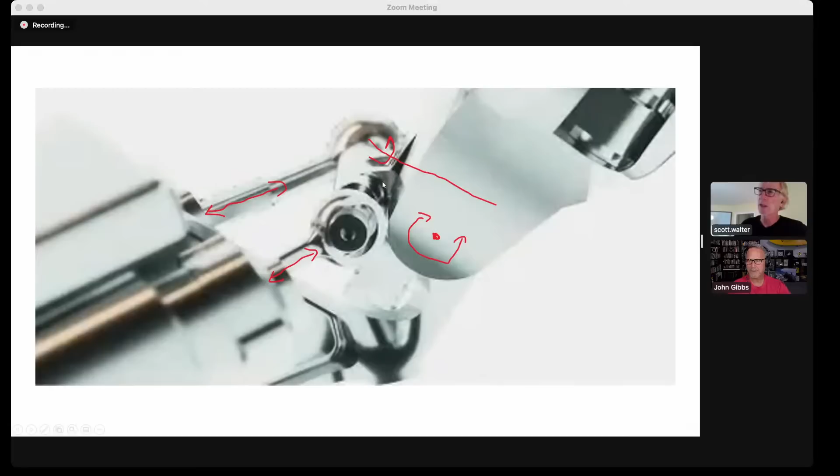Nothing fits. Nothing works. Okay, so if we look at this, what we're seeing is probably articulation here, which is the pitch. This is that yaw, which is that little bit. Right. And what's actuating it are what looks to be these 2 piston and rod mechanisms here that push in and out, and you'll see what looks like a really funny kind of joint here. And that joint is basically a spherical joint. Right. And the idea is it allows 2 degrees of freedom, 2 degrees of motion.

So it's not a pin joint, it has to give a little bit. It has a primary axis where it can rotate a lot, and a secondary axis where you may be limited a little bit, but that's okay. It's not going to be a problem.

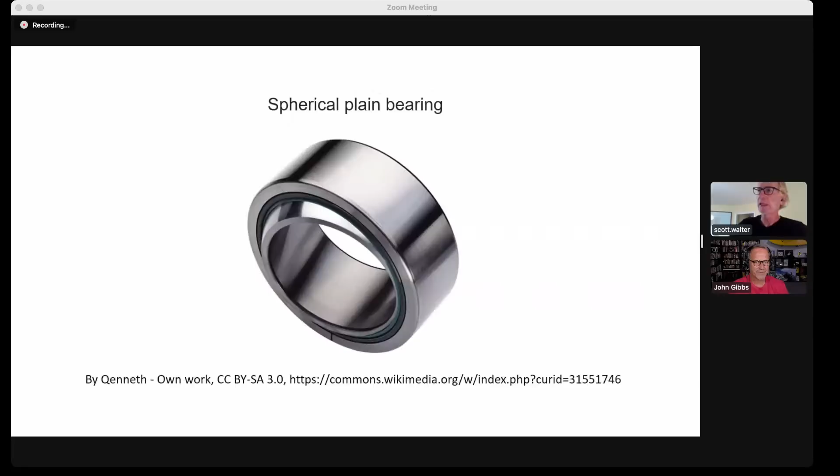It might look something like this. It's not exactly like it, but you can find things like this on Amazon, which is exactly what I did here, I was able to find one. But the basic idea is as the pistons pull, the joint it's attached to has got to rotate also. Yes, and we're going to see that when you get into the reality of the math.

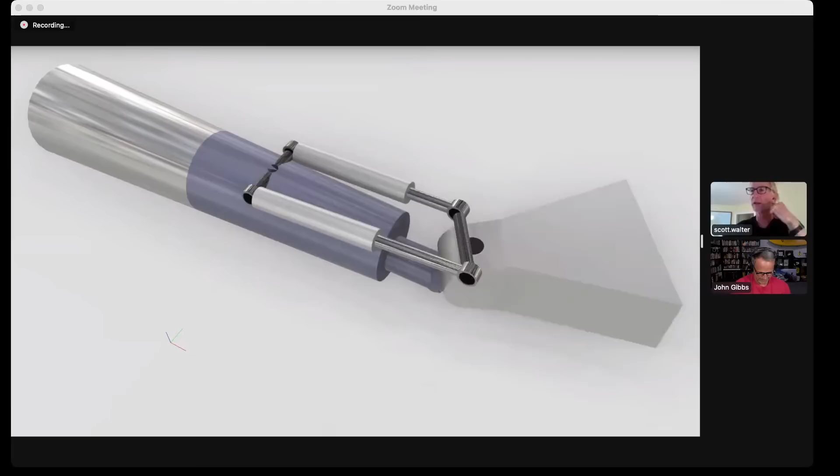This is a simple little movie I made and uploaded to YouTube, you can find it, it's about a minute long. There's also a 3D viewer, which we'll talk about later, that you can download onto your phone, we'll get into that a bit. But you can see a little about what the mechanism does here.

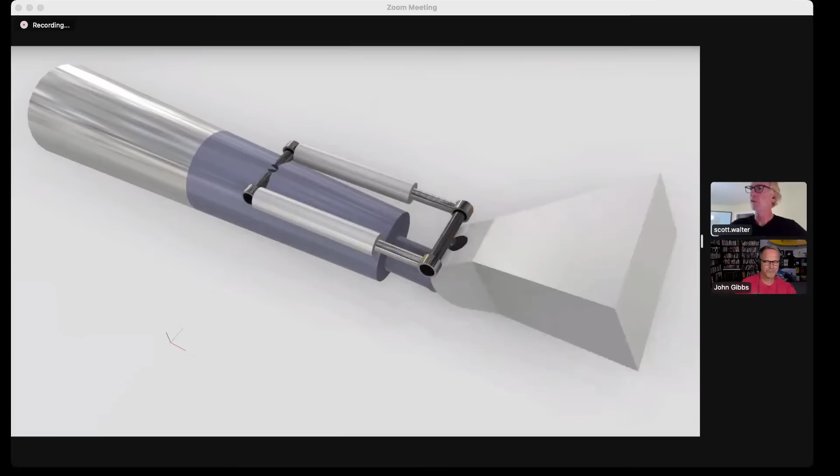I'll run that again. You can see this is the pitching motion, how it's able to do the pitching motion, and that's how it's able to do the yawing motion. Just by having differential movement on those two different pistons, you're able to get the yawing, and if they're coordinated, you get the pitching motion.

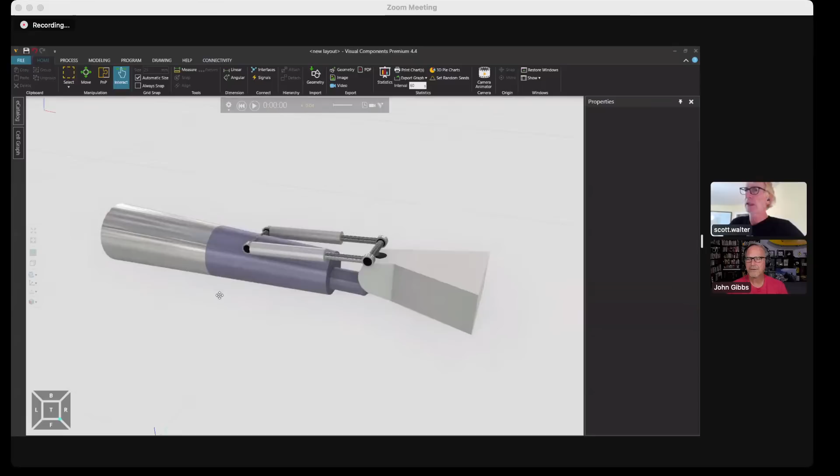Here's where I was able to do the simulation, so we can start to look at this in 3 dimensions. I'm going to jump to an orthographic view now so we can see what's going on. We have an axis of rotation here, and this piston and rod mechanism, with what looks like some pin joints there. The way to analyze it is to overlay a triangle on that. The red and green links do not change, those are fixed, they do not move. You can see there's going to be rotation about where the white dots are.

And if you look at that thing, you would say, okay, so we want to make the hand go up and down, which means we need to somehow change the angle between the red and the green. And that's done just by extending the length of the blue. And when you do that, you see that angle changes. That gets you exactly what you want.

But there's a consequence of moving that angle there. Remember, the sum of the angles has to be 180 degrees. If I change this angle here, that means the other two angles have to change, and you have to calculate those things. You can actually calculate them very easily using something called the law of cosines.

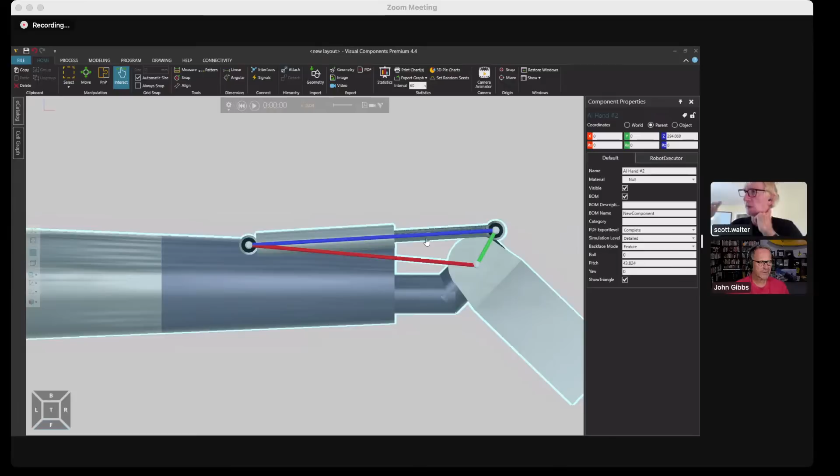And the law of cosines is the general form of the Pythagorean theorem. As a matter of fact, the Pythagorean theorem is the degenerate case when the law of cosines is at 90 degrees. So it's a very simple rule or law that allows you to figure out how it moves. And what that tells you is that when you build this kind of mechanism, not only do you have to have it rotate there, but you've got to make something that rotates here and something that will allow it to rotate there. Otherwise, it just won't work. I mean, that's why it's called the law of cosines. If you don't obey it, it's just not going to work.

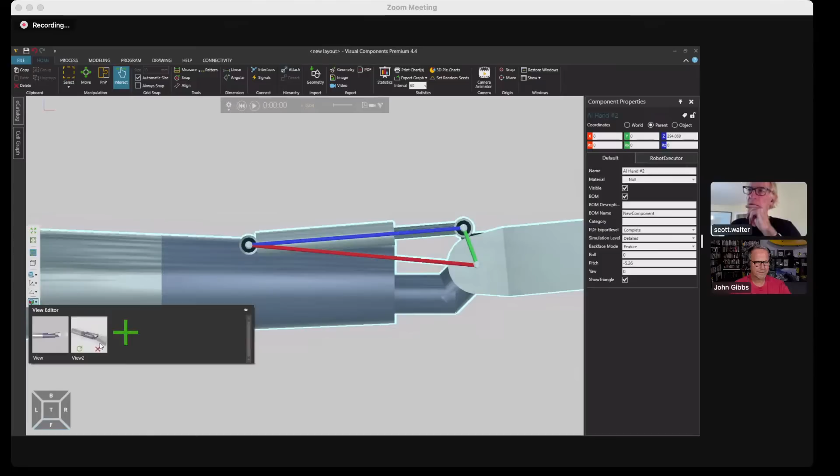Okay, it's very easy to do that in the 2D case. But then when we start to add the other element to it, it gets a little bit trickier, because now when we add the yaw into it, it's no longer a 2D problem, it's now a 3D problem. And you see the triangle kind of falls apart when you go ahead and do that. It just requires a little bit of math to figure this thing out.

Now, in our previous video, we talked about forward kinematics and inverse kinematics. And I said forward kinematics is easy, it's like arithmetic, whereas inverse kinematics is very complicated, and that's where the real math happens. It turns out in this case, it's the opposite. The forward kinematics is very difficult to do, the inverse is super easy.

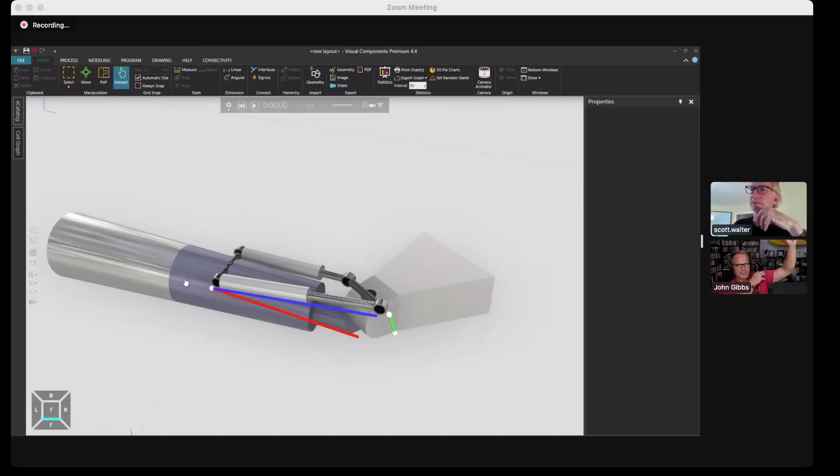And that's because what I didn't say in the first video is that rule applies to serial link mechanisms, in other words, mechanisms that are chained together. This is a parallel kinematic mechanism. Just to put that into perspective, shoulder, elbow, wrist, that would be a serial mechanism. Right, exactly. So here we go.

We have this thing, and it's a little bit tricky to get it together, but we can get it to articulate. And of course, the first thing everyone kind of wonders is how do you roll the wrist? How is that being managed? Well, it's very simple, it just rotates about here. That's it. Doesn't do anything other than that.

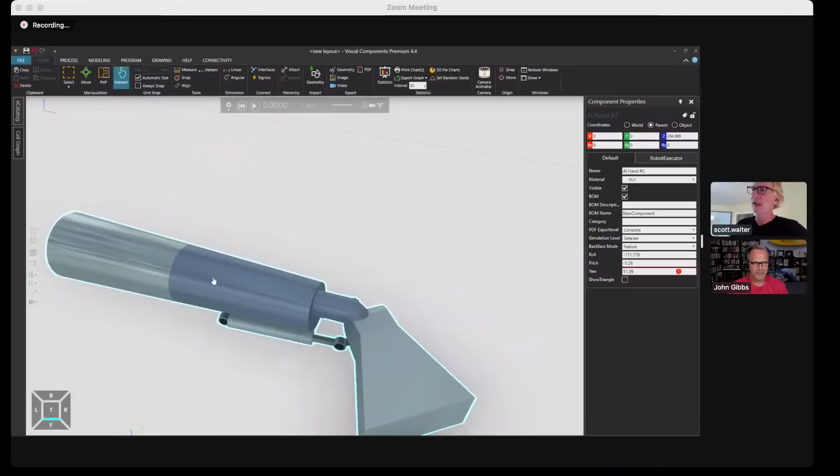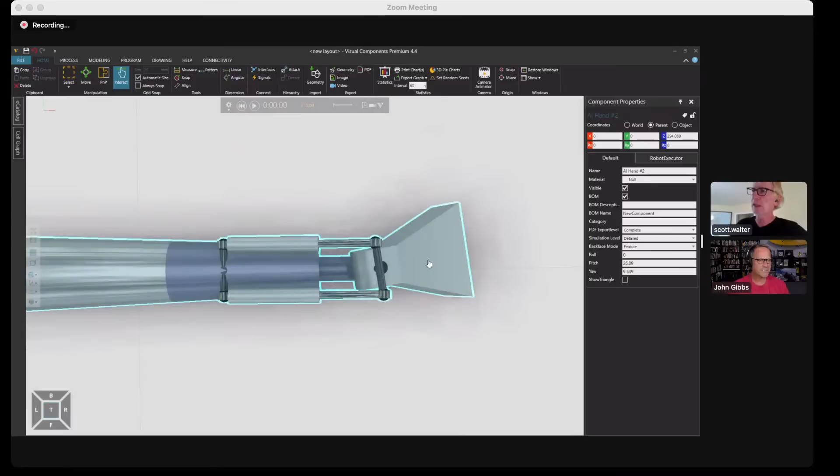And then if we want to be able to do the yaw, you see we can yaw back and forth this way, and then by extending these things forward, we can get that pitching motion very easily. And we can see when we do this, when we go to the top, that when we go to the yaw, it's introducing some weird things here. So we have to have a spherical joint everywhere. We have no choice. In order for that to work and to stay together and be mechanically sound, you have to do that. You have absolutely no choice.

So Mark Plott just threw up a question, which we actually talked about yesterday when we were discussing this, which was why, I think what he's talking about is no pistons or pulleys, but basically the idea of hydraulics and things. But we want to get into that. Can be driven by anything. They don't have to be driven by hydraulics or pneumatics. Right, or anything.

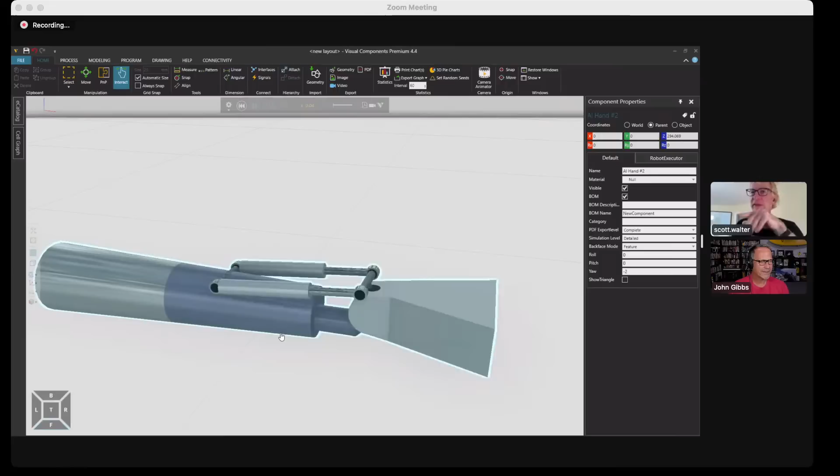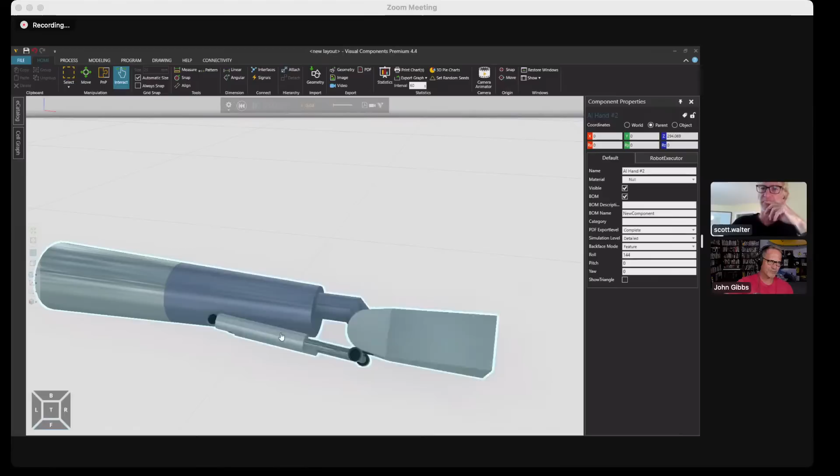So, now, that is something we want to touch on. Do you want to touch on that right now, or do you want to defer that? Because that was the question I threw out to you yesterday. I said, okay, John, how is that actuated? What's going to make that thing go back and forth? The three obvious things are hydraulics, which is fluids, pneumatics, which is air, or some sort of gearing system, which would use a ball screw drive where you have some sort of motor spinning inside of there. Now, these proportions are not quite right.

If we go back to the original drawing, that cylinder looks really big and beefy, and I'm not quite sure why it has the dimensions it does. This was really rough, just to show schematically how this mechanism works.

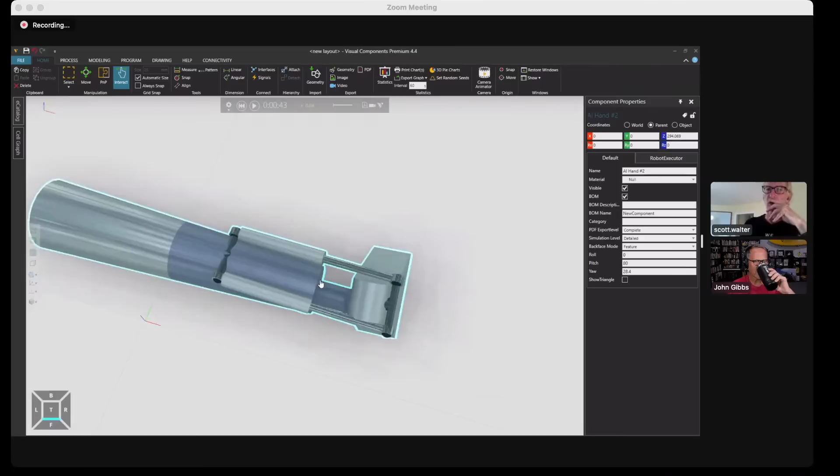I'm pretty sure it's not hydraulics. Now, it does look an awful lot like a forklift, or not a forklift, a backhoe, or front loader, something like that, which you're used to seeing. The thing about hydraulics is they can deliver a lot of power and force very easily, and you just have one motor that's pretty much building the pressure. All you need is a bunch of valves to control it.

That could be one way of doing it. But the problem with hydraulics is they're really leaky, and it's very hard to make seals that won't always leak. The other thing is they're really too powerful, and remember, you're supposed to be able to overpower Optimus, not the other way around. So you probably wouldn't want that. You don't want Optimus to just come up and go, 'Hi, how are you... squish?'

Recall that the grid fins on the Falcon 9 are hydraulically controlled, but for Starship they're going to be actuated by the motor. So even SpaceX is like, well, hydraulics are all very nice, but we're not going to use them in the future because they have too many issues. We think it's better to have them actuated with servo motors. So I don't think so.

However, pneumatics is kind of somewhere in between. Even if they leak, who cares? It's just air. And you can store a lot of power in something like a small scuba tank. This would be like the most steampunk thing if it was, you'd be going constant back and forth doing this. So, hey, maybe it would be.

Hydraulics, I give zero chance of that. I feel like pneumatics has no chance because it's just too loud. I won't rule it out, but I've already been proven wrong regarding the yaw, so I have to hedge my bets and put it out there as a possibility. If it turns out to be true, you heard it here first. But I'm going to say it's probably not.

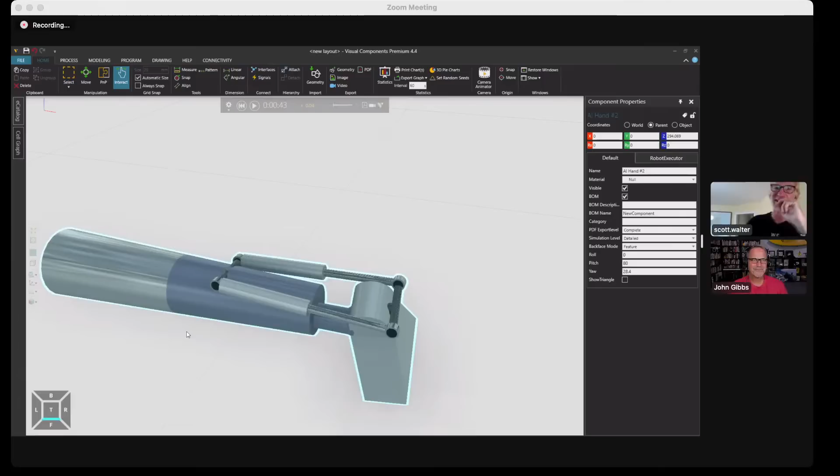It would be pretty annoying to work around a robot that was hissing all the time. But again, it could be kind of cool, and it would be possible. The thing about it is they're very hard to control because it's more of an on-and-off thing. It's something you typically use in a clamping mechanism, you just want to open or close. If you want something in between, it's very hard to control. However, it's really good for force control, so depending on what they want to do, I wouldn't rule it out. You get some pretty bright control engineers between the two organizations, they may have solved a few problems, but I don't think so. I rule it out now. That would be interesting.

Just as an FYI, Mars Embassy asked what about memory metal or other options besides screw drives and things. I don't know enough about that to give a reasonable answer about memory metal.

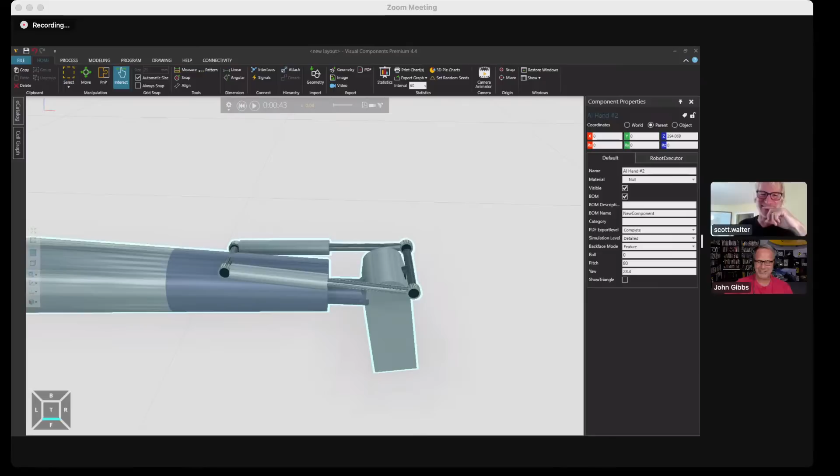Wasn't that Terminator 2? I think that was mimetic alloys. So let's please not turn this into... he's already trolling you, John. It's already turning more silver. It was white and clean, now it's turning silver, so we're already turning into the Terminator. There you go.

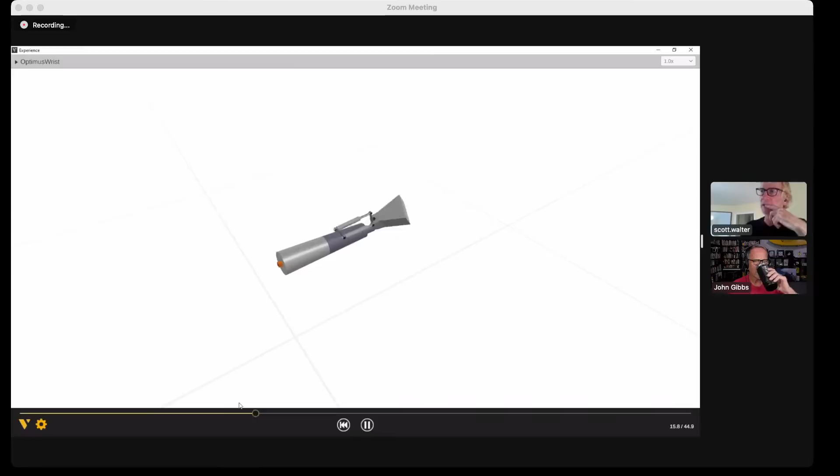Okay, now what I'm quickly going to do here is show you basically the same thing, but notice the application is a little different. What you saw before is the authoring tool that allowed me to build something. This is actually a playback, and as you can see, it's not a movie, it's actually an animation that you can go through and view. This is using a viewer called Visual Components Experience, which is free to download online.

I can even show it on my phone, not just here on the screen. Here is my phone right now, we can see that, so there it is on there, and you can move it around and have all kinds of fun with it.

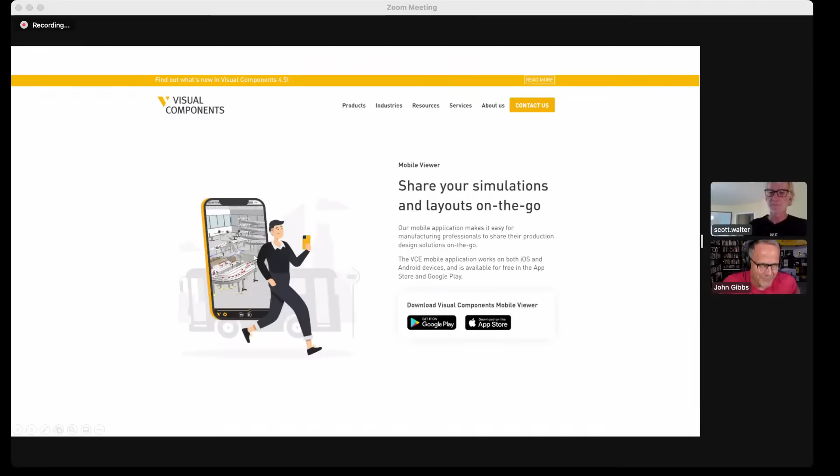Okay, so Mars Embassy and some others were talking about this. Is that the memory metal actually is something that changes? It's more like a muscle where you apply an electrical voltage across it. It contracts, I believe. But again, I kind of wonder, is it kind of like an open closed state, or is it something you can control in between? Again, I'm not sure if you get the fine control.

Well, the other thing you have to remember is not just the wrist, but also the fingers, right? Because there's an awful lot of stuff that has to go on in the fingers, and having memory. We're going to stay away from that. Possibilities. I'm going to touch on the fingers. I want to talk about those briefly, but anyway.

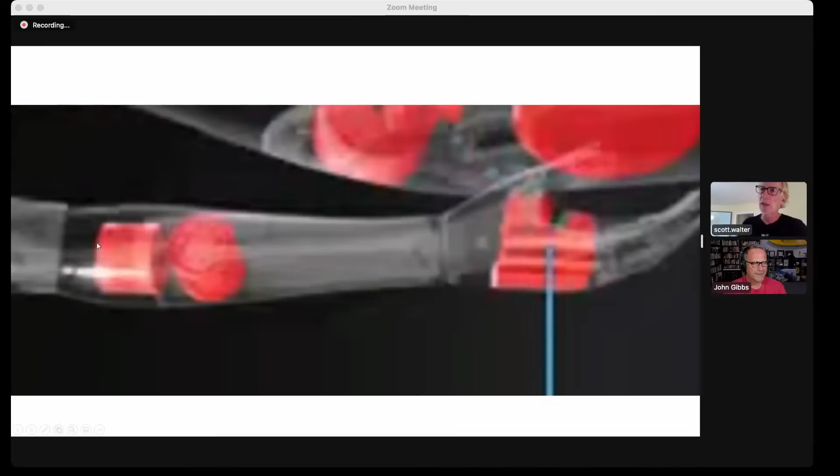And then sure enough, once I do a prediction like that, it's completely wrong, because now this is indicating that right about here is where the forearm rotates. So it's not split in the middle. It's like this whole piece here rotates, and the elbow is back about there. So you have a small chunk here, which is the elbow, and that whole forearm is then rotating through there. Exactly. Okay, so we got that. Now, you got other things. Geo30, Geo5 gave you a great find for the shadow stuff that's inside that original image.

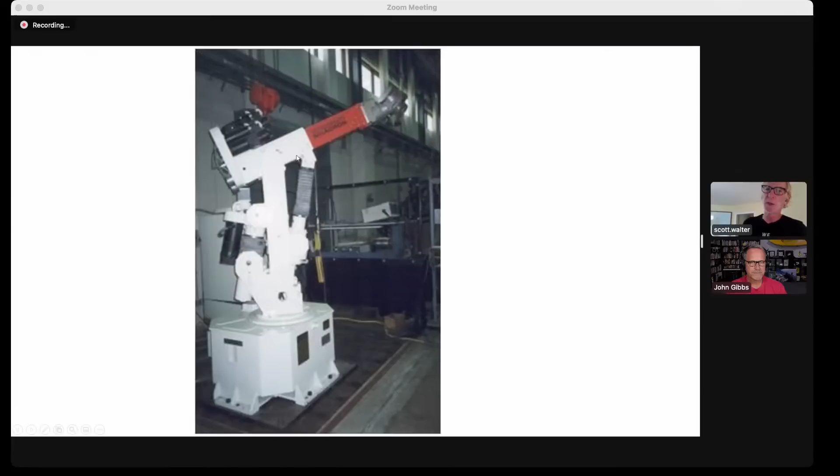Yeah. Now, the other thing I was wondering is whether the elbow would do the similar thing, because we know C3PO has something like that for the elbow joint. Do you put an actuator in there? Normally, you want to put an actuator right in there, but there is historical precedence that in the early days of building the robots, the servos were not compact enough to actually fit directly into the joints. So they use these ball screw mechanisms here to actually move these things. So there is no motor here. That is just basically a follower joint right there. And it's as a result of the extension of this and that. So it's a very similar thing. So you could be doing that.

And again, if we go back into here, I'm seeing the same kind of weird mechanism here and something that almost looks like a connecting rod. I wonder if the elbow is also being done the same way. The elbow might be powered back here, because something looks weird about this. And also that looks like a joint, but that joint doesn't look right where the elbow is. So that might be where the connecting rod connects to the tie that's going to allow it to articulate around there. There's something strange about all that's going on in there.

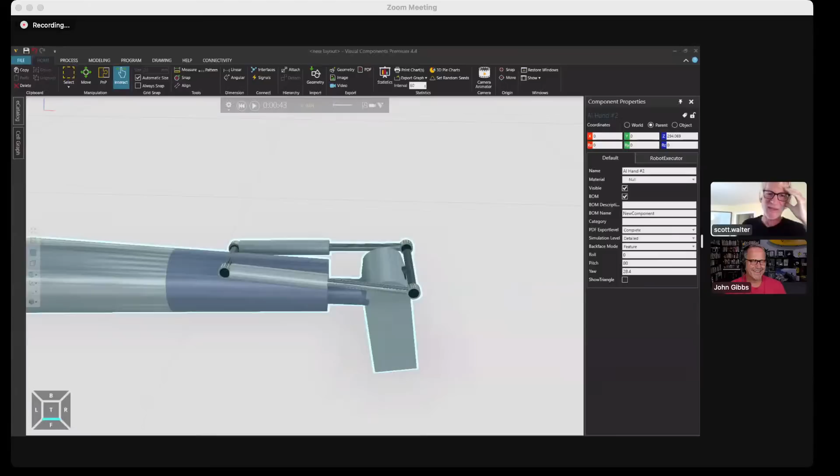So now let's go back to the simulation. So I discovered this last night, and I still do have a day job. So I'm trying to go back into here to figure out what that thing looks like. And so here we go. This is my new version. All right. Oh, I like this. Okay, so you've actually tried to model it out a little more closely. Yes. So what ends up happening here is that you've got this thing rotating around. That thing rotates there.

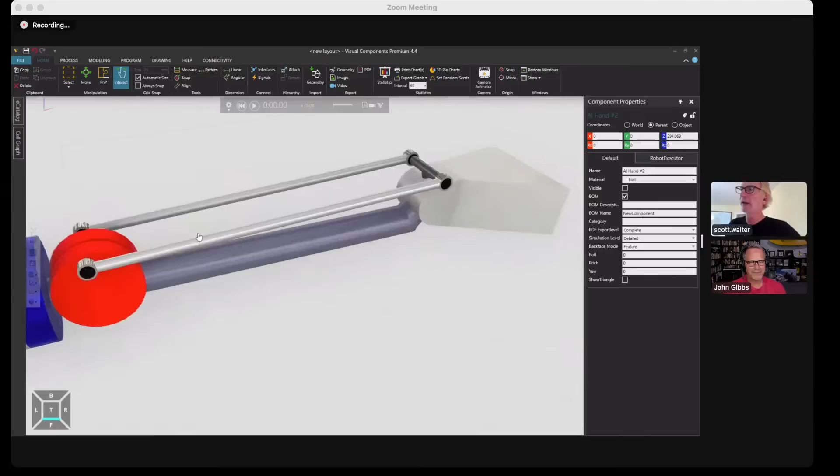That's a very common mechanism. It's basically a 4-bar mechanism, sometimes referred to as a parallelogram type of mechanism. You can't quite see the parallelogram in there, but there is a node here, a node there, another one here, another one here. And if these links are all the same, it's a parallelogram; if they're different, then it's just a 4-bar mechanism. But it works that way, and then you can get this to work.

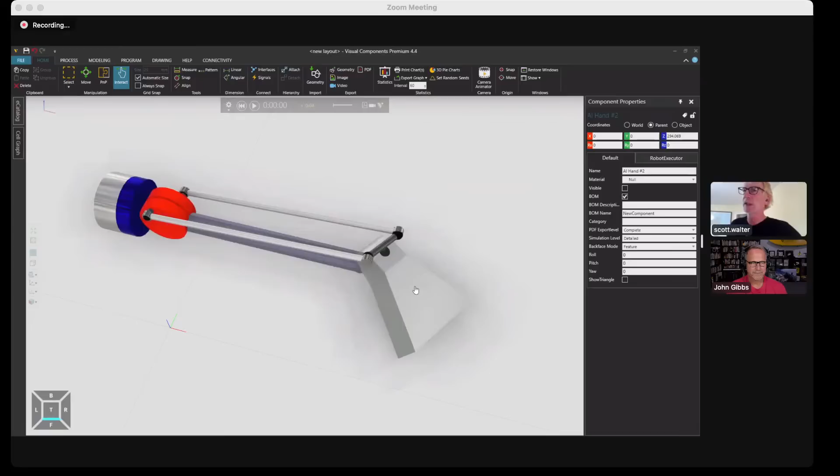Now, what's really interesting, I only solved the 2D problem. I've only got halfway through my solution because, like I said, I didn't have time to finish it off. And I thought this whole thing was going to fall apart. And you'll notice for the little bit of yawing we have, which is about what the human hand does, you could be fooled into thinking that thing's staying together.

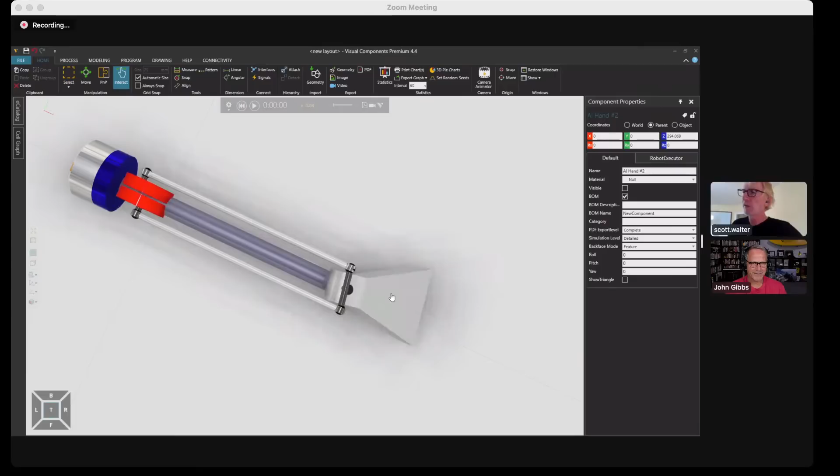Now you can see when I do this, my math is falling apart. Yeah, I did not get it right. Right. But for a very short range, it's working pretty well. And it looks like they stay pretty parallel. Yeah, it stays way more parallel. I was expecting the angles to be all over the place, and it looks like it might actually be able to do it without anything funky or weird in there, in these different positions. So that is probably closer to the way the mechanism works.

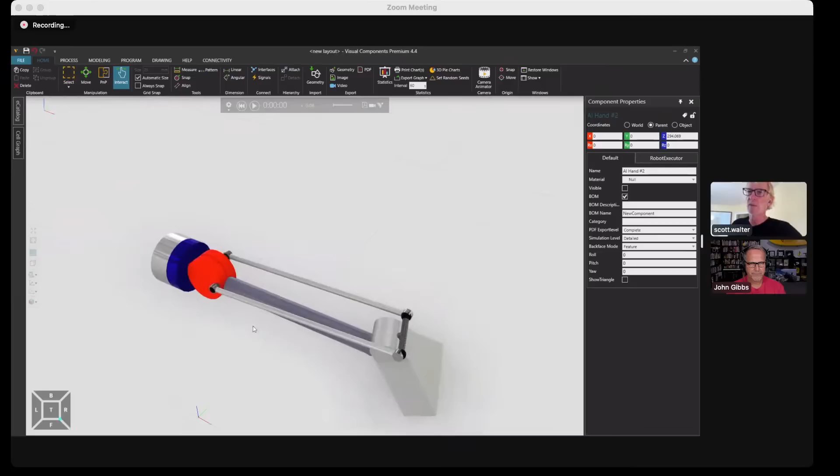That's what I think. And this is what I was holding back from you, John, all day. All right, you did tell me there was something coming up. So that is very cool. I love that you went back, because I kind of just assumed that the original was just trash. I was like, that was last year. But you're saying, no, they could actually do this.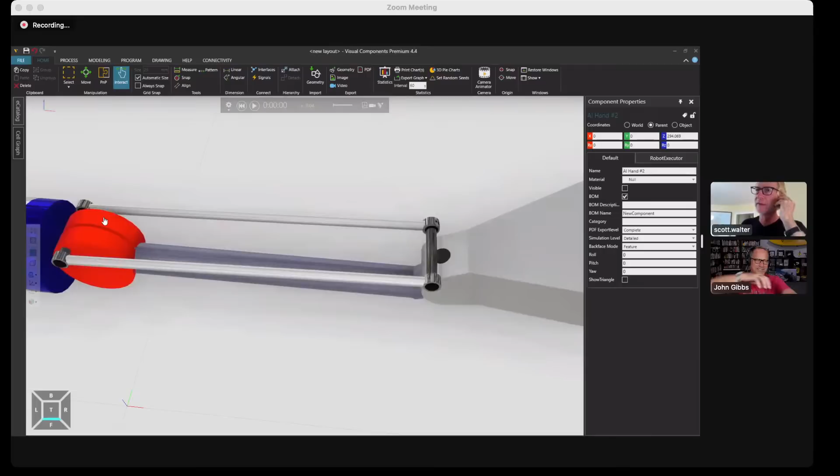Yeah. There still is the matter of that big box that's on top of the wrist in the new image. Yeah, that we're having a hard time with. Well, I personally think that has to do with the fingers, because you still have to control the fingers, and you can't control the fingers directly because it just takes up too much bulk.

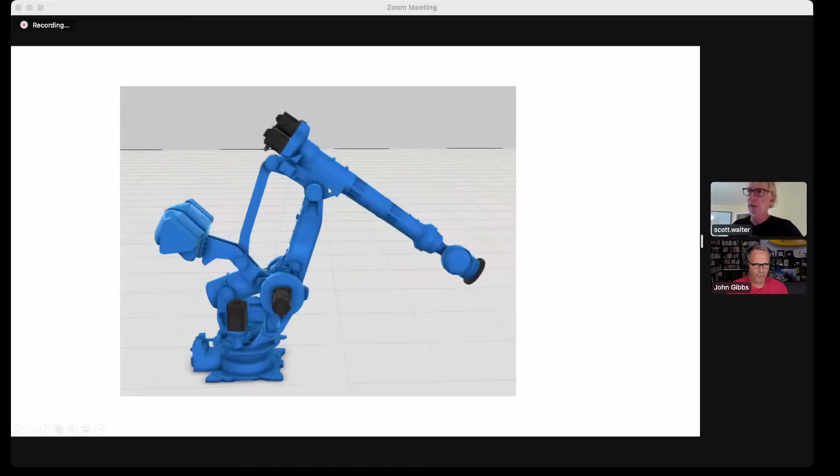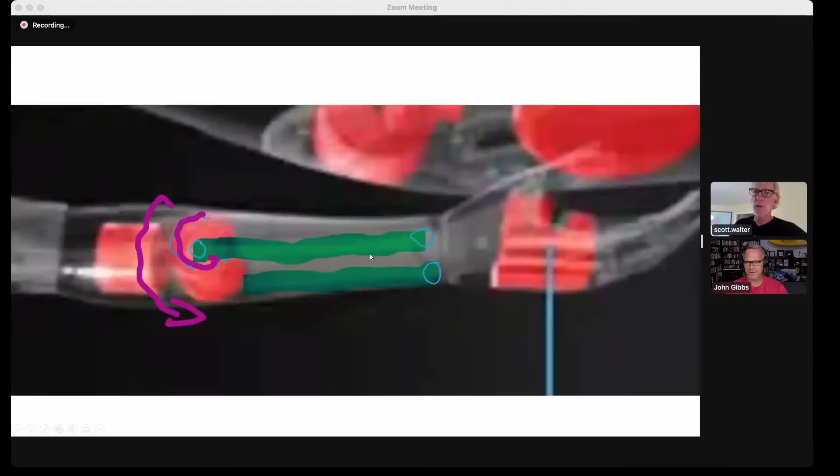And then again, I liked the close up here. I'm sort of wondering what's going on there. What could be that possibility? Right. Let me quickly go back to the slide that we were originally looking at, and that is going too fast. There we go. Okay, so let's go back to the original slide. We're talking about this thing here. What is that? Yeah, that's the thing that's interesting.

And again, looking at these things, this is interesting in that there seems to be something inside of a sleeve here inside of something else. Right, so it almost looks telescoping. So I almost wonder, maybe I am wrong, and it doesn't go all the way back there, and they've put something in here, and that's the full servo control right there. That could be very different.

Right. When I tried matching this perspective with what I had put together, I could not get the perspective to match, because you see how these are kind of diverging. When I try getting the same thing, they actually converge together. And that just seemed weird to me. Why can't I get these rods to go the same way? If this really is a render of some sort, then I would think I would be able to match that. So there's some other things going on that's hard to tell, because everything back here is hidden. We cannot see it.

But that's rather interesting. And then this thing, why is it there? It's just in the way. Yeah, it's a big extra bit of bulk. So a distributed battery, Dusty asked that question. I've talked about that before, the possibility of distributing batteries all through the body. Yeah, but why there? I've got my watch on here, but whenever I do any work, this watch gets in the way. Yeah, it's just going to get in the way.

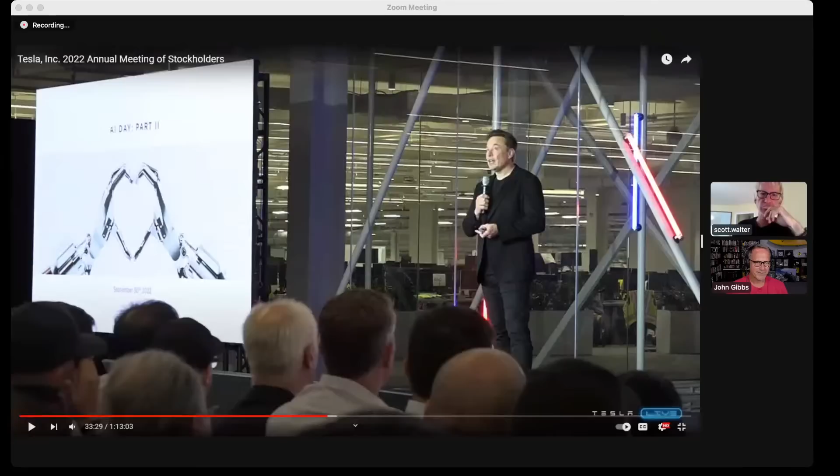Now, one of the drawbacks of this mechanism, can you think of what some of the drawbacks are? Well, it's bulky for one thing, but I think the first thing, one of my conclusions here, if I get that up from the current slide, right there, is the mechanism is sloppy. Yeah, there's no doubt about it. The reason why they like to have the servos directly on the axis is that you have much better control of the axis, and there's absolutely no slop. Where you're driving it is where everything is being actuated, and you can measure it there very easily. So this mechanism is sloppy.

You've got 12 moving parts to accomplish basically 2 degrees of freedom. By the way, Tronicum actually suggested perhaps it's a local AI board, which would be really interesting. Distributed processing, you've actually got a processor hanging out right over the wrist. That would be really cool. So the result of this is reduced precision when you make a mechanism like that.

Every time you add a degree of freedom, you're just asking for more things. You've also got the fact that you're going to have deflection in those arms. You can make them very stiff, but those tie rods going along there are going to deflect. Direct drive is much better for accurate applications, which is typically what industrial robots do. But industrial robots are really dumb, which is why we have to build them to be so exacting and so precise, to make sure they are repetitive and can do the same job again and again. But they have no vision.

Yes, there are systems that are set up with vision, but for the most part, they are driving blind. They're assuming the part is where it's supposed to be. So when you start coming in with something that has vision, the question is, does it matter? Because look at our wrist. Our wrist is probably one of the worst designed mechanisms. If you were trying to design a wrist, you wouldn't design it this way. Yet it works. And it works because we compensate with software.

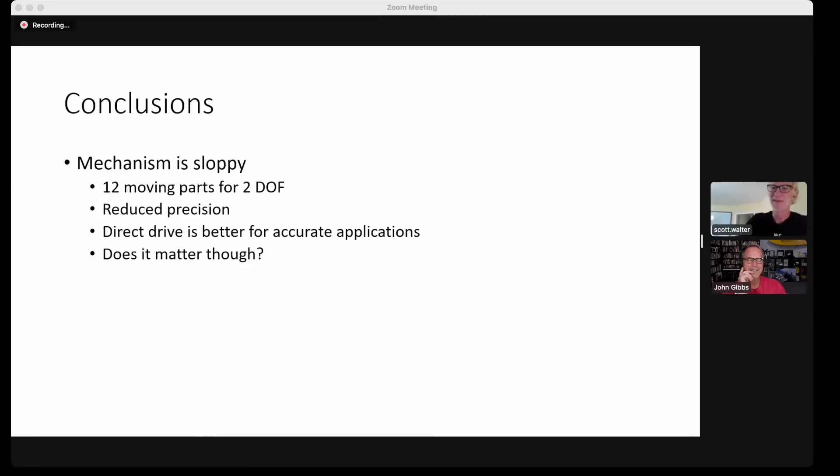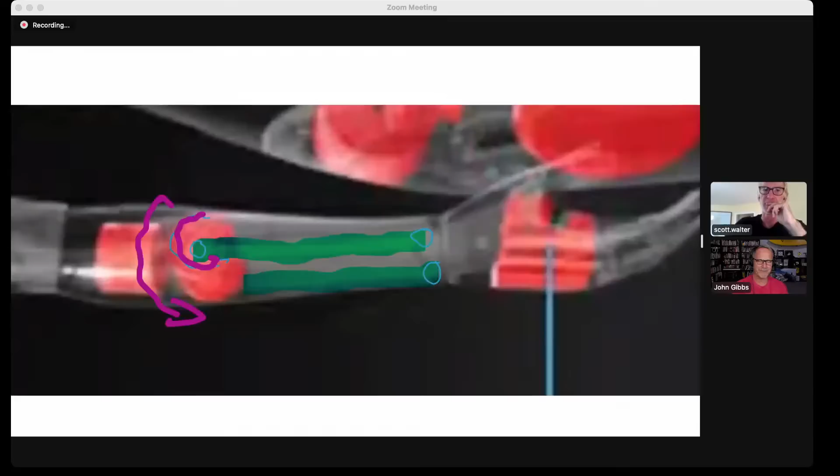We just don't know about it, but it looks... I mean, my personal opinion is it has to do with the fingers more than the wrist. I love the idea of memory metal for the fingers. That's cool, but if you're going to do it with cables, someplace you have to have the little things that wind the cables up and back down again. So you've got to have room for all of that stuff.

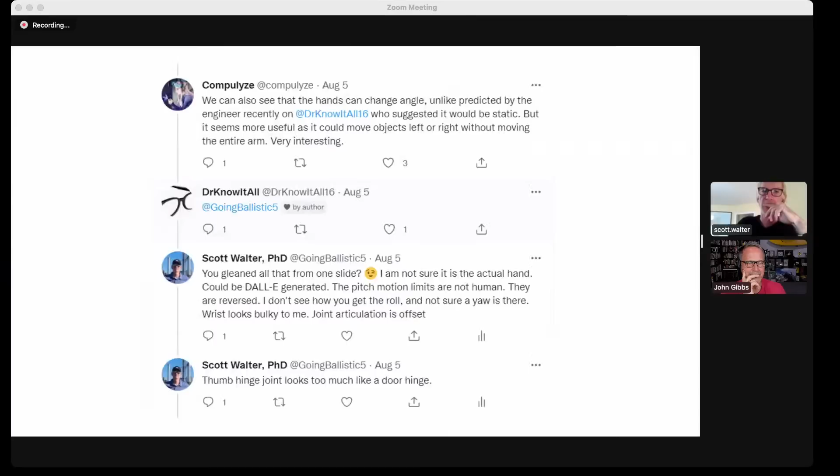So, can you go back to the picture, the original AI Day slide? The very first picture. Yeah. I know it's all the way at the beginning. No, that one right there. Okay, so

I think it's at least worth pointing out here that the fingers are not normal human fingers. Scott and I have been debating for quite a while how many fingers are actually on the hand. There might only be 2 fingers up there and a thumb, so he might be like Mickey Mouse. He thinks there's at least 4. I think there's 3 fingers plus the thumb. But it's possible he's just Mickey Mouse, because doesn't Mickey Mouse only have 3 fingers? Right.

But now, Connected Dots pointed out that, I was saying you don't need the pinky because no one drinks their tea with the pinky anyways, right? It's supposed to be raised. So you only need 4. However, if you want to palm a basketball, you need the pinky. So not only will Optimus suck at soccer, but will suck at basketball. Probably the spiral too, if you want to do a spiral pass. Isn't the pinky kind of important?

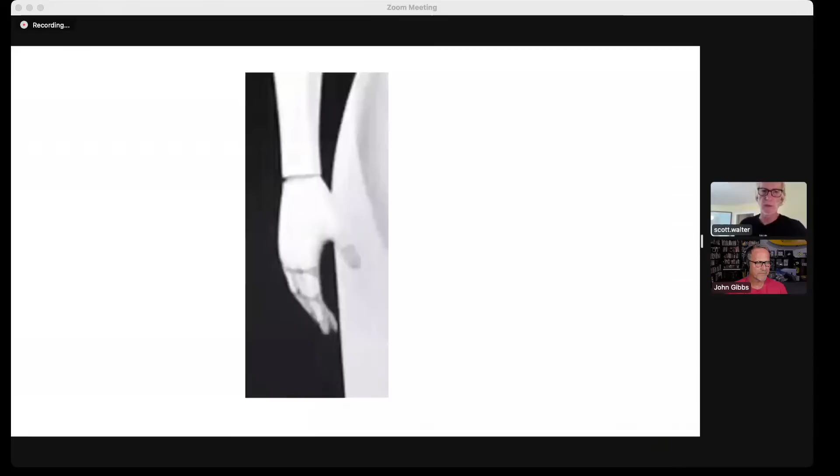And then we have no idea what's there for sensors, but I assume these black areas here are some sort of tactile sensing. And I want to give credit where credit is due: Compulyze thinks he saw nails. When he said nails, I was thinking of carpenter nails, but your fingernails. So there might be something in there for being able to do the grip.

Tronicum says maybe the fingers can spin around and rotate. So the problem is the control mechanisms for it. It's just like the human hand: we have no muscles in here, it's all here. So the deal is to make this as thin as possible so it's flexible. And I think you're seeing basically the same degrees of freedom. We can go almost plus or minus 180 with the forearm, and it definitely looks like it can do that. Based on that mechanism, we have about the same for the pitching and a little bit with the yaw.

It's the kind of thing where if you take your normal hand and pitch down, you try yawing, but you really can't yaw anymore. The result is you end up moving your forearm instead. So most of it happens when you're flat, and you'll see the same thing happens with that mechanism: as you add pitch and try moving with it, the mechanism starts to self-collide and just won't work anymore. So in many ways, it's just as limited as the human hand.

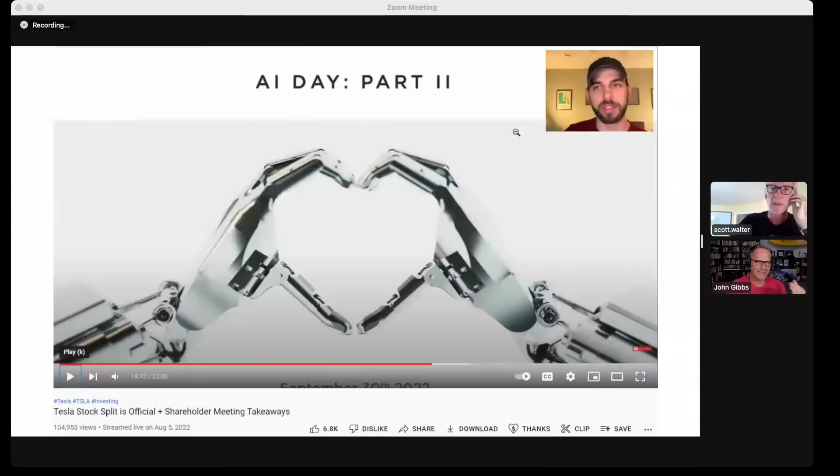And the question is, you may remove capabilities. A lot of what people say about this is, why would you design it this way? Because you could make it more optimal, doing something optimal. But I think the first principle here is that it has to behave and interoperate with human beings in a human-designed environment.

Now, on my little YouTube channel, I posted this just to show what is it that Optimus could do. This is a typical human operation. If you look at what's going on in the back there, the robots are doing operations that humans can do—welding, assembly, and everything else.

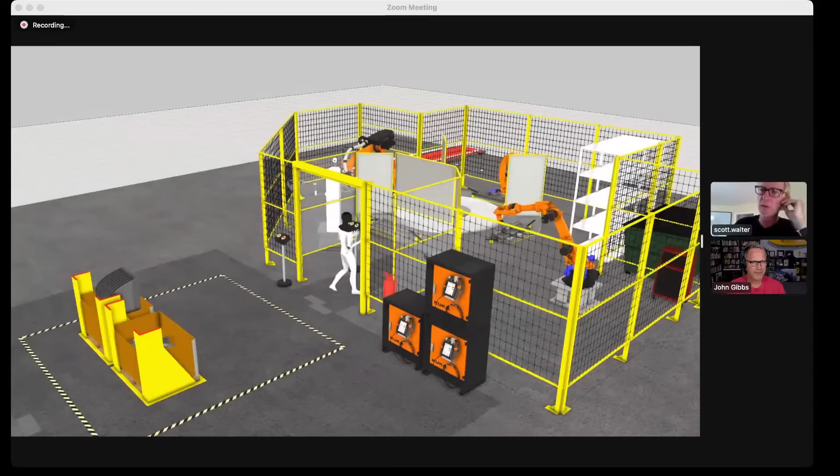The problem is that end-of-arm tooling—only those robots can use it. You cannot drop a human suddenly in there and say do the welding task right now, because it's completely designed for industrial robots, not for humans. And vice versa, you cannot take a human weld gun and put it in there and expect one of those orange robots to use it.

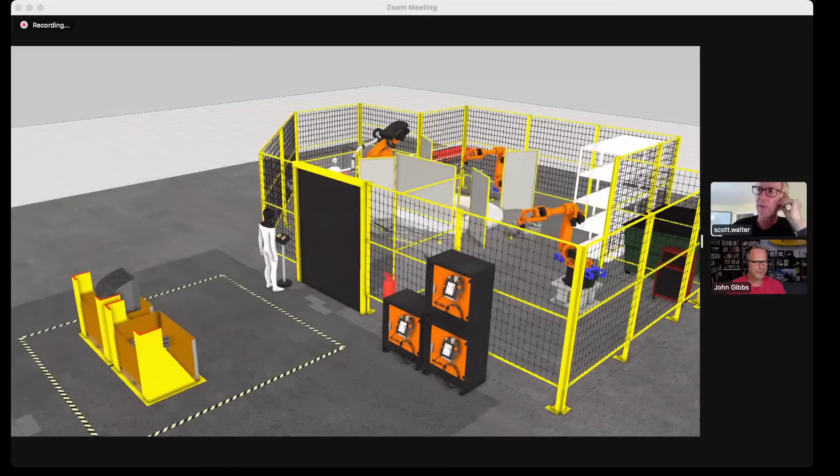You can't. The idea of Optimus is that it's able to do the same task that a human can do. And you want it that way because the idea of Optimus is not necessarily to replace the workers, but to supplement them and fill in the gaps when needed.

Because there are staffing shortages all the time. Every day, some people may not show up to work for a variety of reasons, and you need someone to be able to go in and do that particular task. A lot of tasks are simple, repetitive, and boring.

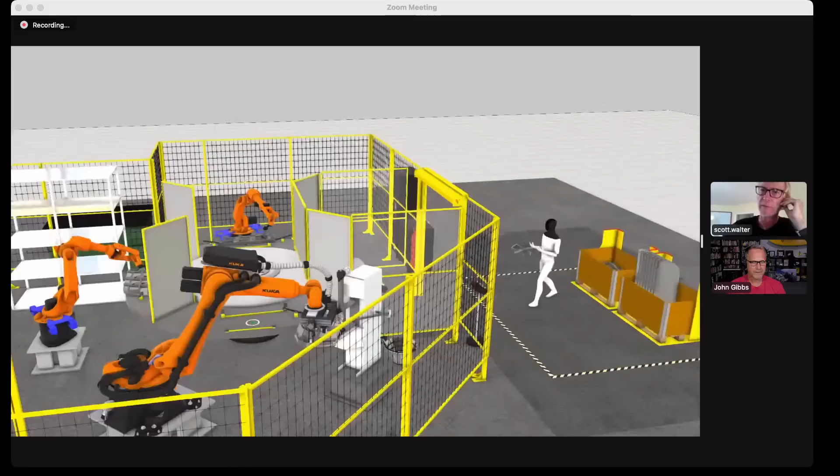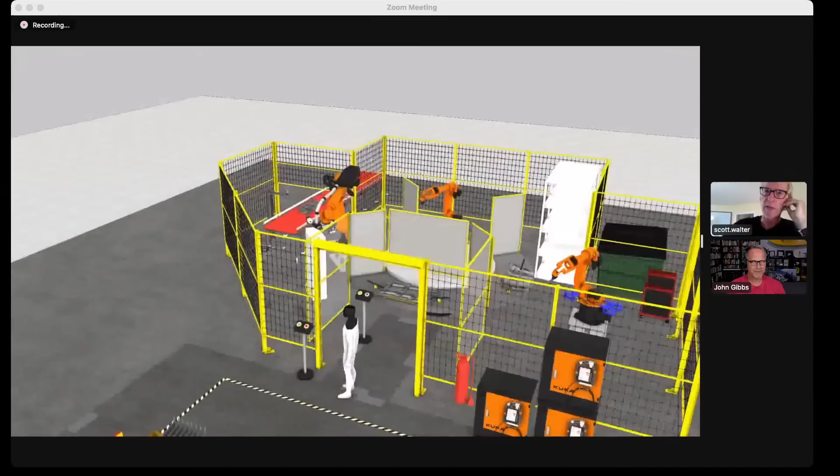And you see, this is very simple. The whole idea is that the fixtures are going to be there. It's not highly detailed on what's going on, but the idea of the fixtures is that you basically just drop it in—like this poka-yoke kind of thing, where you almost can't screw it up. You just drop it in and the fixturing will locate it accurately for you. So you pick them up, bring them over roughly, drop them in, they slide into their appropriate location, and then everything else takes over.

So it's a very simple operation for Optimus to do at the beginning. And I think that's important for people to realize too: number one, it has to interoperate with humans in a human-designed environment, and number two, this is Optimus version 1.0.

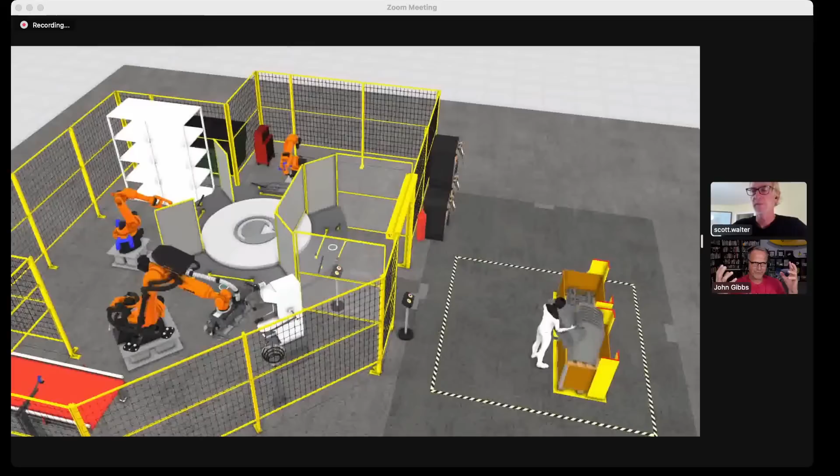Eventually, in 2040 or something, we might have one with incredibly dexterous, fully formed eight-finger hands like an octopus or something—who knows? But that's not for version 1. Version 1 is the simple robot.

And the other thing to remember is that Tesla wants to be able to get a return on investment right away, and there are two ways of doing it. They can start selling them to lots of people and make money that way, or they can actually put it in a production environment and start lowering the cost of manufacturing.

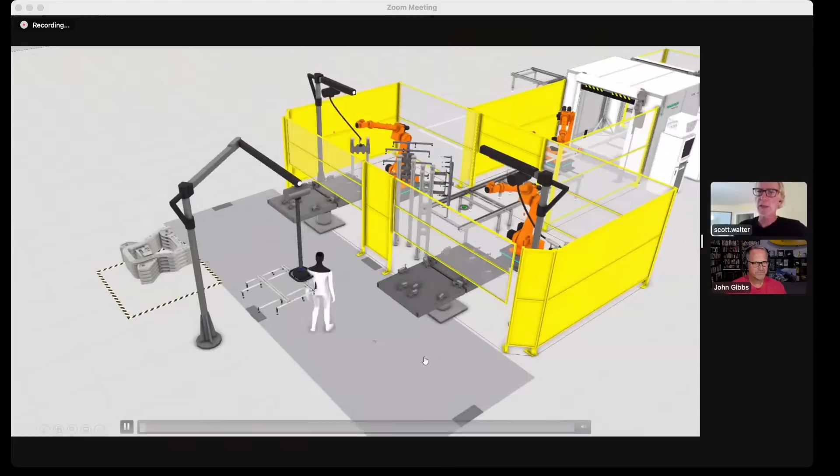So, another similar example—I called the first one 'Optimus feeding the robots at the zoo,' because that's what it looked like. In this case, the question is, what about if the parts are really heavy, bulky, and difficult to move around? Well, humans have the same problem. They're not allowed to lift anything over maybe 40 or 50 pounds, probably less, and if they are, they need to use a lift assist—because if you're doing that for 8 hours, there's no way you can lift up a part like that and continue to do it.

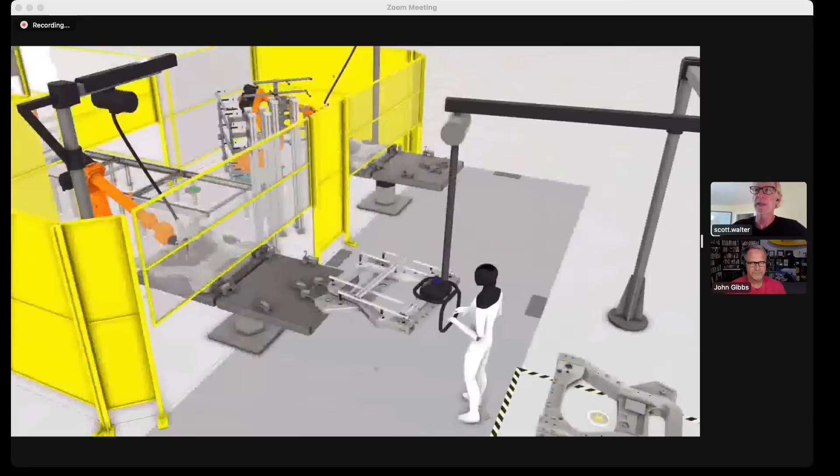So these lift assists are designed as a very simple tool. Just go ahead and pick it up and move it on over. Optimus could do that very easily. It does not have to be really fast, since the takt times are already set at being around a minute anyway.

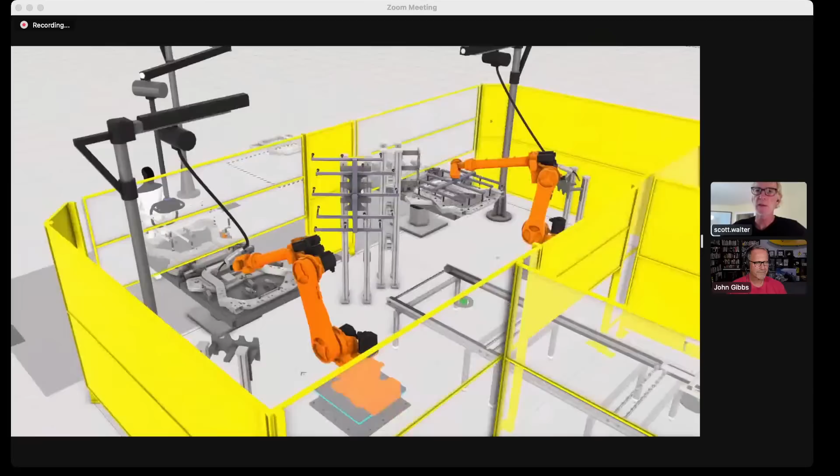Oh, we got a comment from Teslabot. That's cool. Dusty said all it has to be is better than a human in a spacesuit in order to go to Mars, which is also very true.

If you look at this compared to a person, even with gloves on, what if you were working around a furnace or something and had to be wearing very thick gloves? That makes your dexterity go way down, so Optimus is going to have an advantage with that too.

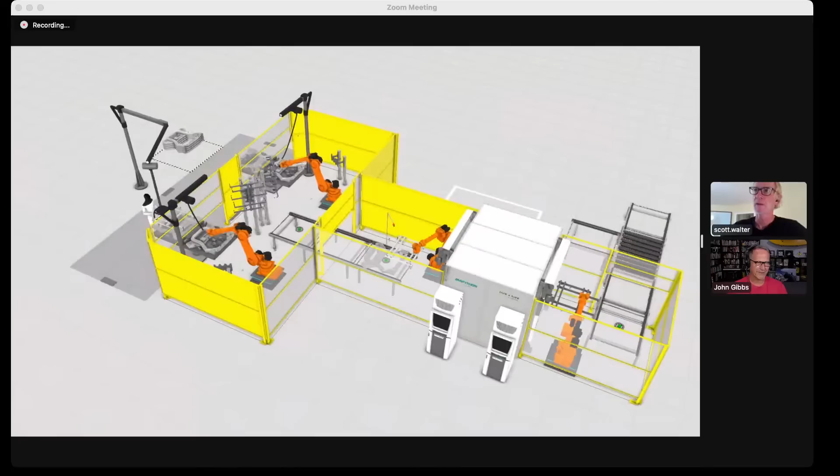The other thing to remember is that all these applications here in the plant, when someone is picking up sheet metal, they are wearing gloves. They have to, because you need the personal protective equipment, and one of them is that they're going to be wearing some sort of gloves to protect their hands from getting cut on that sheet metal. So already your dexterity has gone down a little bit, and all of these things are really important.

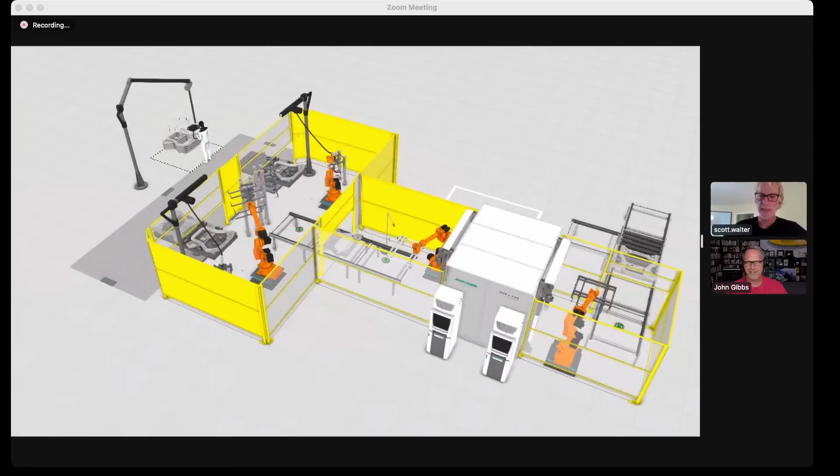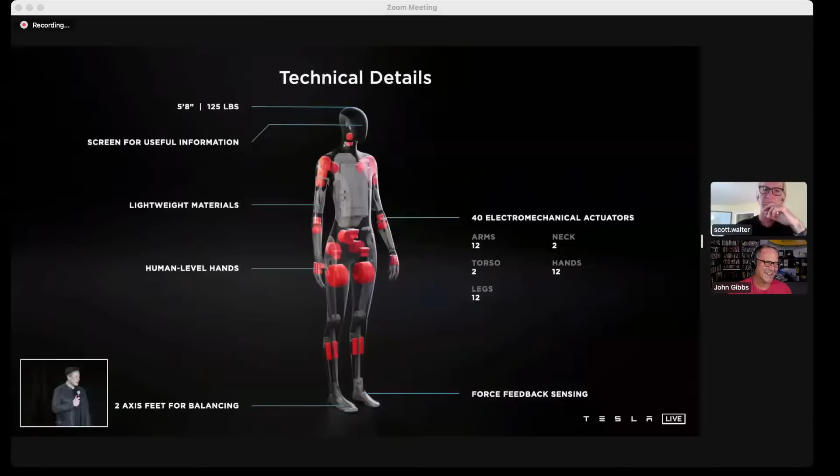Somebody said Teslabot only needs one finger, the middle one. So it's Elon's little thank you to everybody else, I guess. We can just leave that picture up and people can ask questions about that. Does the Teslabot qualify for UAW benefits? Jeez, we're gonna have robots uniting into a union.

Human hands in gloves have a lot less dexterity, exactly. And again, as we said at the beginning of this, if you missed it, we are speculating on a picture, so there's a lot of room for error here. And we're really good at that, we're really good at speculating on one picture.

It's going to have to have some sort of force feedback. It's going to need to know, otherwise it's going to squeeze things too hard or too soft. There can be so many ways to be able to sense that. You may either be sensing it at the fingertips, or you may be sensing the resistance that's happening on the joints and the pulling of the tendons. That's all you really care about, is how much tension you have to put in there.

So I'm trying to get - Dusty posted a picture of this. Well, crap, it's not going to show up, but he cut the background out, so it's kind of interesting looking, but I can't open it for whatever reason. You want to take over? I would, except it's not opening, so don't worry about it. I'm looking at it right now, trying to determine if there's any reasonable... it doesn't provide that much useful information. It does show how big the wrists are though - when you cut out the background, the fact that the pack is on there makes them really, really hefty.

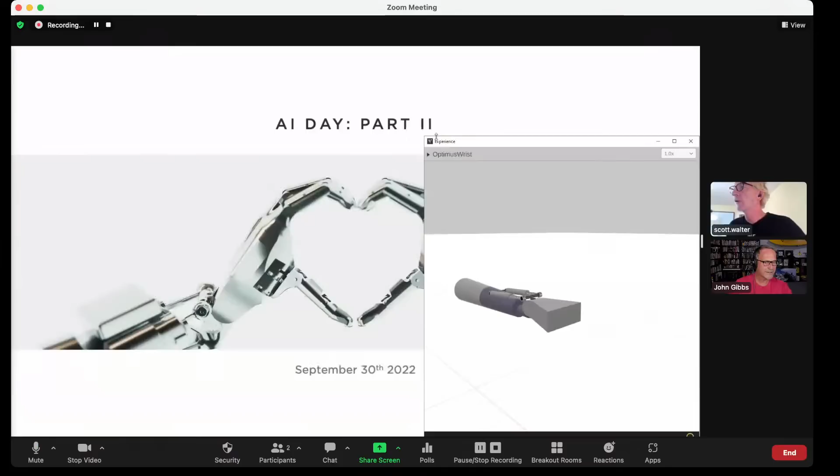So it's interesting, let me see if I can go ahead - if you stop sharing, see if I can get both of these kind of going at the same time here. If you stop sharing, I'll try to share. All right, I'll stop sharing. We should probably be reasonable - it's been an hour, so let's say 5 to 10 more minutes, answer some questions.

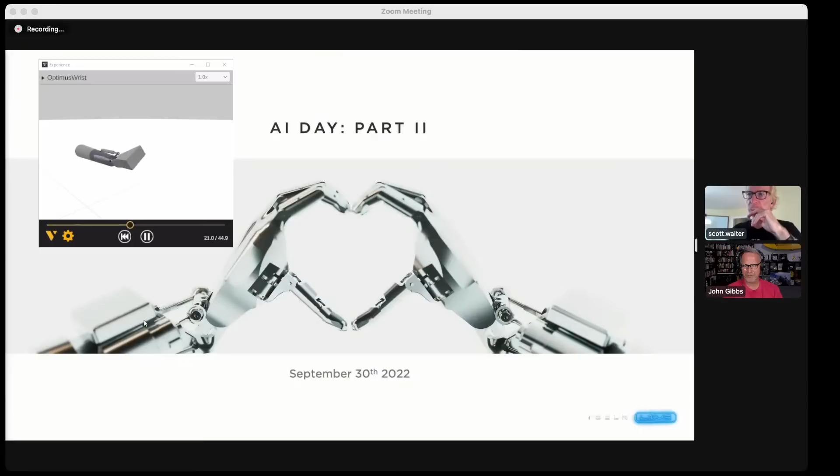So Jay Collins said, would the Teslabot have more than two cameras, do you think? I believe I brought this in this time for a reason. I forgot this last time. There it is. Autopilot cameras. Yes, it has more than one. I think it's going to have the same number as Autopilot would be my guess, that it'll have like 8. So it has eyes in the back of its head like your mother. That's the terrifying thing about this Teslabot, it's going to know what's going on behind it. You can't tease it.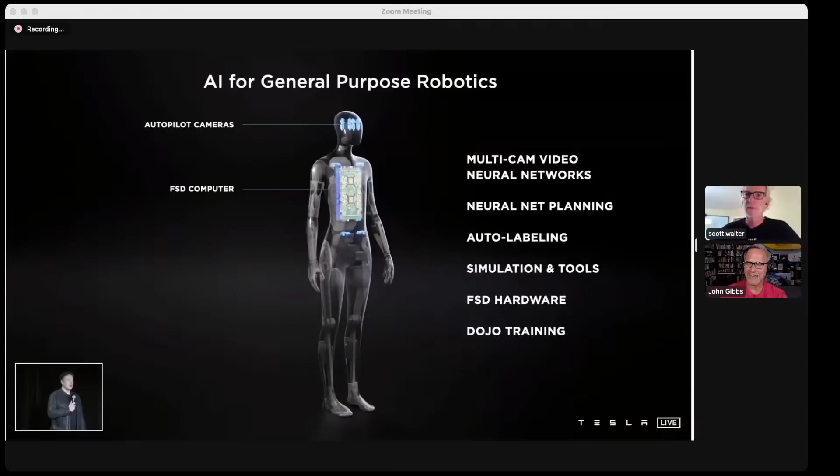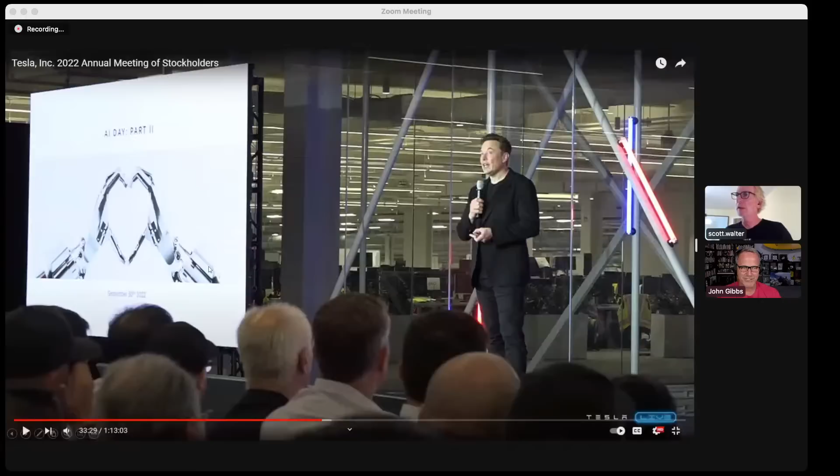It's going away. Gotcha. Todd Murray said, "Why is the shadow on the left arm yellow tan under the wrist box?" We don't know. It's obviously reflecting something, but we don't know what that thing is. Let me get back to the original. Yeah, there's lots of weird reflections. These here, we're trying to figure out why is it tan or gold over here and not over here. Right. And we just don't know. Well, C-3PO was gold, but he did have some silver components in one of the movies, remember? Right.

So here we go. James Douma says that the hands have to be dummy hands because he can't see the actuators. What do you guys think about that?

So, okay. Mark Plott has definitely a good point, which he says the charge port should be in the butt. Because, I mean, open butthole. It's like, it's got to happen, right? Okay. Or go sit on it, Optimus.

Yeah, this is the question. So they're dummy hands, that's what James thinks. He's saying that they're not actual real hands. But again, it could be internal. I mean, he could be right.

Now, since James is online, he is the one that came up with the $10,000, remember? No, this is somebody claiming that James Douma said this. I haven't seen this personally. Okay. Yeah. But anyway, sorry, who was that? That was Geo30, Geo5 said that. So there you go. Okay.

Yeah, we need to get James online right now and have him respond to this. I can talk a little bit about the kinematics and stuff like that, but he clearly can talk about the AI, and probably a lot of the hardware that's going on there. There's an awful lot that we don't know.

I mean, I'm intrigued by the idea of memory metal that Mars Embassy brought up first. I think that's a really interesting idea, but I don't know how exotic they want to be right away. I think you want to kind of stay traditional on your prototype, and they know how to make certain kinds of drives and everything else. And if you do too much right away, I mean, remember the third one, optimize? Exactly. It seems like using something exotic like that...

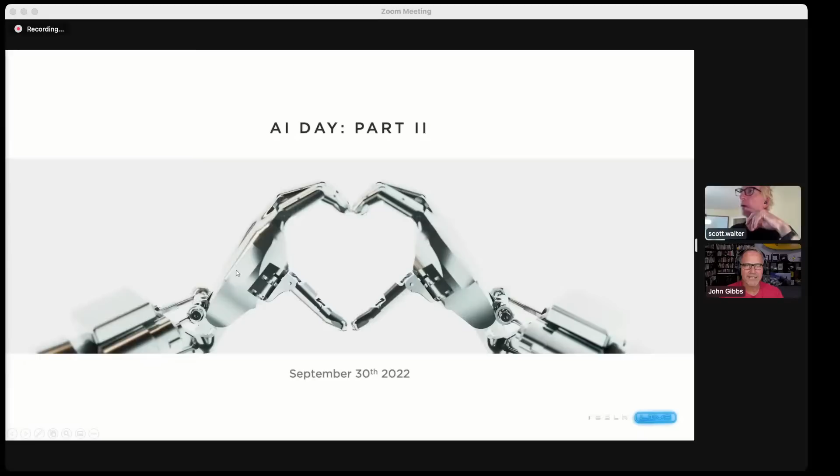I'm getting a request from Robert Bergman to zoom in on the hand. Just pick one side and zoom in, since you're the one who's in charge of that. Okay. Let's see if I can even zoom in on this. Well, you have the zoom in here where you had the rotation. Oh, okay. At some point I have one that is like this. Yeah, like that. There we go.

So it doesn't show everything, but look at the thumb. That's really interesting when you zoom in that far. It looks more like a barrel. It looks like a piece of sheet metal hanging out to me. It just doesn't belong there. It's some really weird artifacts. And the angles are so harsh there. They're like super 90 degrees. Very weird. And again, I don't know why you have this sleeve inside of that sleeve.

That would usually indicate some sort of telescoping mechanism, which would tell you that maybe it is a servo drive. So my idea of everything being way back at the other end is completely off. Well, but it still could be. It just could be a sleeve that's inside of another sleeve, for protection. It's possible that they want to protect the movement of that from something else, because as it gets closer to that big part, it could get tangled up in there.

And it could be one piece that's not really riding inside of this. It's almost like a conduit that's protecting it, because it has to be able to wiggle around in there. Exactly. And that could be the reason, that it's wiggling around in there and you're just making sure it doesn't bind or get caught up in anything else. You're absolutely right. So it could be that it's not concentric with this one at all.

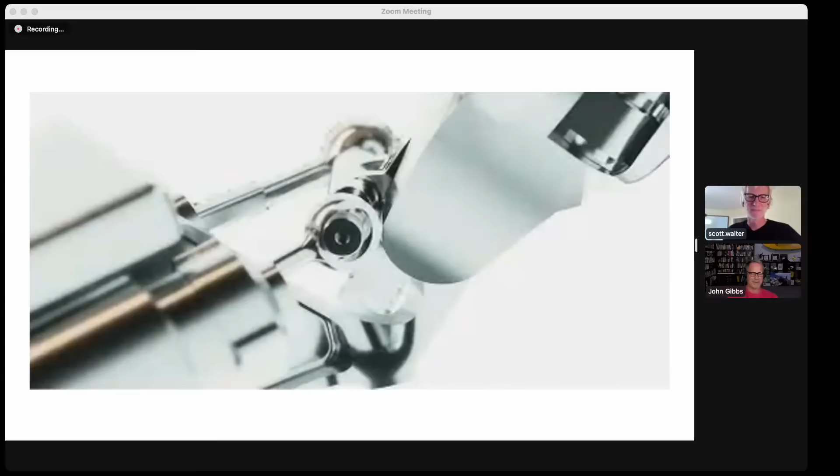So I think everybody in the comments, we're having a lot of fun talking about this, but don't get too carried away because it's unlikely to be in demo 1 that it's going to be able to do quite that much stuff. I mean, like you said, cooking an omelet would be a pretty massive undertaking. That is a basic robotic Turing test. So riding a unicycle while juggling, why not? Yeah, yeah. Oh, jeez. Shooting baskets, right?

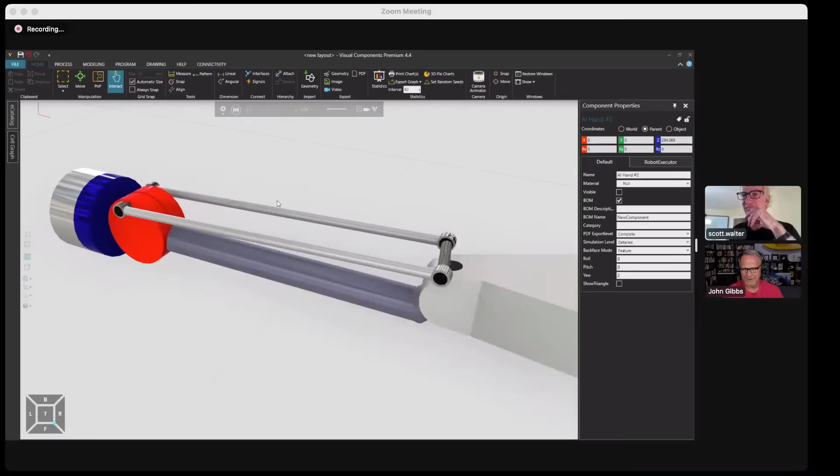Right. That was in, which movie was that in? Oh gosh. The sci-fi movie that... Shooting baskets? Yes, yes, yeah. There was one of those interstellar kind of movies where it's generational and you just have the robot that's tending the spacecraft the whole time. Oh gosh. I think Jennifer Lawrence was in the film. Oh, is it called Passengers? I think it is called Passengers. Something like that. Yeah, yeah. But that's a good point.

Oh, this is interesting. Leslie Franklin says a Craftsman factory, which is a tool making company, just opened in Texas. So how about send the Teslabot to the Craftsman factory and have it grab some tools. So there you go. Glass blowing demo.

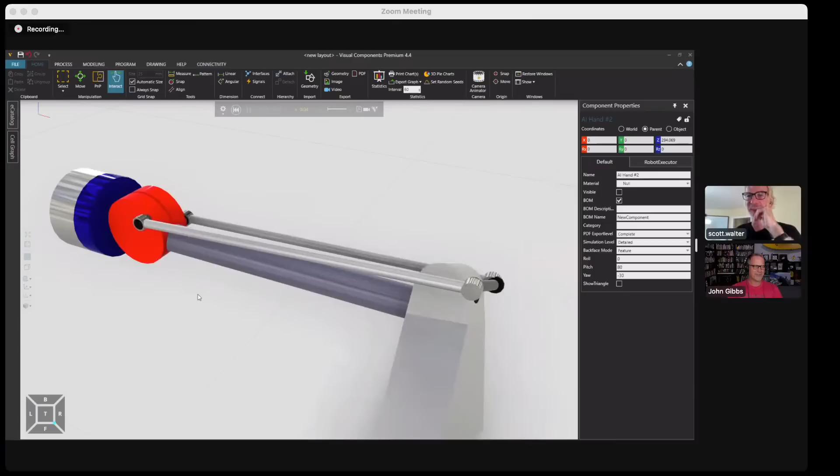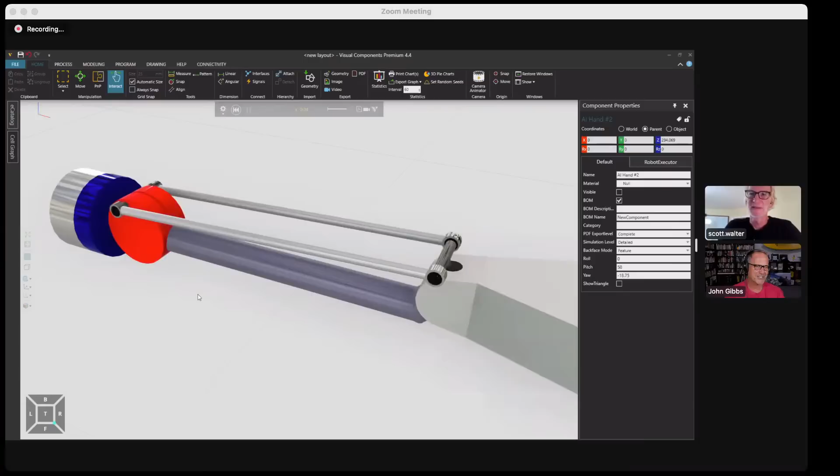Jeez. All right, folks, I'm going to call this one. We have been talking for almost 90 minutes, and this has been a blast. Thank you so much, Scott, for being part of this and for creating these little demo things. These are great. A lot of fun. I think that we'll have a lot more to talk about as the time gets closer. But the interesting part is going to be 6 or 7 weeks from now, whenever we get to September 30th, to see just how wrong we were in so many areas. So hopefully we'll be right in 1 or 2 areas.